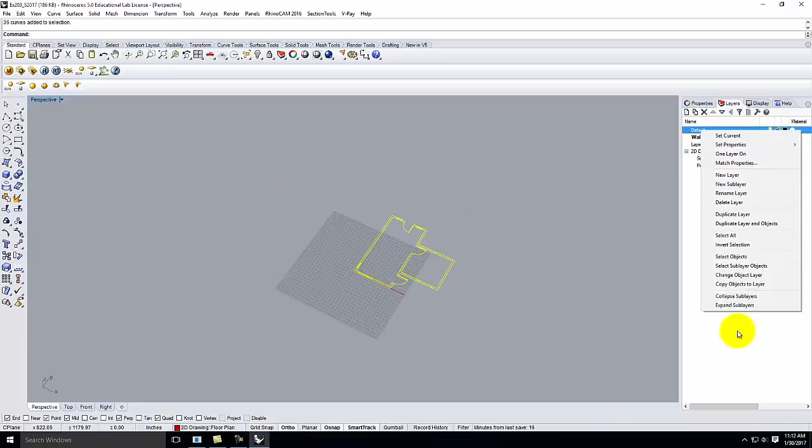So anyway, right now we're going to continue in our basic drawing in Rhino. And I was one step ahead of myself here. Okay, so I'm going to go back, and I was showing this in perspective as we got started, but I'm going to go ahead and get myself back into the basic top view. And this is a little bit further along than I got when I was demonstrating it live last class, but this is approximately where I hope you got as part of your last exercise.

So for today, for exercise 203, I want you to go ahead and start working with your exercise 202 file that you did last time. The door swings and the doors themselves are not really critical at this point, nor are really the windows. We're going to use them as cues as part of this drawing that we're doing today, but you can make some modifications as we go along.

So before we get too in-depth in today's drawing, I want to take a little bit of time and sort out our basic layer structure. And I haven't talked about layers just yet in Rhino, but as you start to move forward and create more and more complicated drawings, layers become really critical in Rhino. And I would argue that layers are even more critical in Rhino than they are in AutoCAD or in Illustrator or in anything else that you're doing.

Because as we get more and more complicated 3D models, we can have hundreds or thousands of layers. Let's say I'm doing a house, and I may have layers for a bunch of the house geometry itself, but then I may bring in an object, a furniture, a couch, a table, a chair, and that object might have 10 different layers associated with just that object. And then I bring in 6 different couches, and suddenly you can see how this multiplies out in a hurry, and I start to have lots and lots of layers.

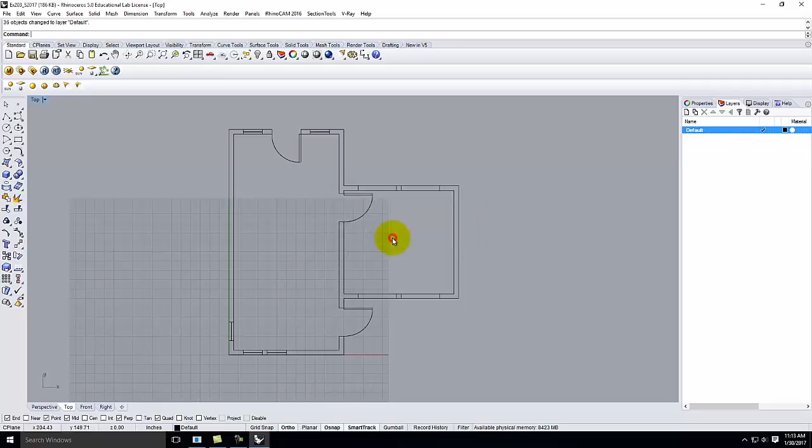So let me go ahead and delete these layers. We don't need them for right now. Yes to all. So chances are in your drawings thus far, you've worked in your default layer. If you're not seeing your layers over on the right side here, across the top in the standard ribbon, there's a little pie-shaped piece. It's a red, white, and blue pie. If you click on that, it will bring up the layers palette on the right side of your screen.

And chances are you did your drawing on the default layer. That would be my guess. Usually that's the default. It's the equivalent of layer 0 in AutoCAD. So it's your base layer. Now, as we move forward, we're going to want to create layers. And if we look at this layers palette at the top, the first button here is New Layer.

And so if I click on that, it will create a new layer. By default, the new layer is just numbered, layer 01. If I were to create another one, it would be layer 02.

Naming your layers really helps, because if you leave them as layer 1, layer 2, layer 3, and you had 50 layers, you wouldn't remember what was on what layer. So you really want to start thinking about how you organize your layers very early in the process.

So I'm going to go ahead and call this layer 2D drawing. I'll type out 2D drawing, and I will click off, and it will stay as 2D drawing. Okay? Now, one of the best things about Rhino and its layer structure is Rhino allows for you to nest layers. So one layer can be a sublayer of another layer.

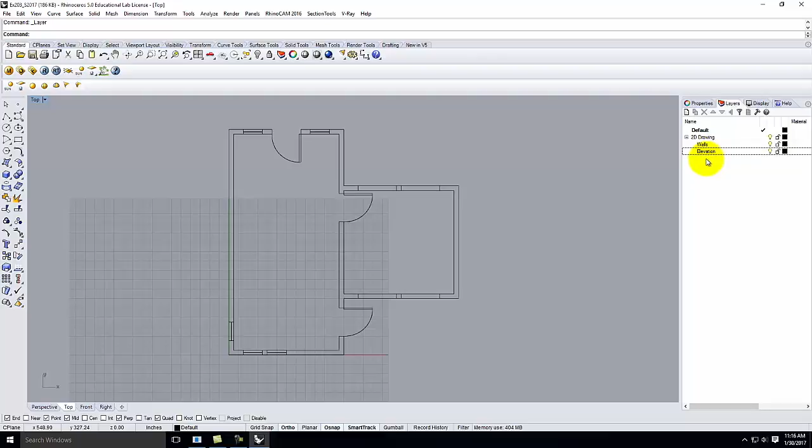Okay? So now I have a 2D drawing layer, I have a walls layer. And while we're here, let me create another new sublayer, and we'll call this elevation. Okay, so I have a 2D drawing layer, a walls layer, and an elevation layer. That's starting to work out rather nicely.

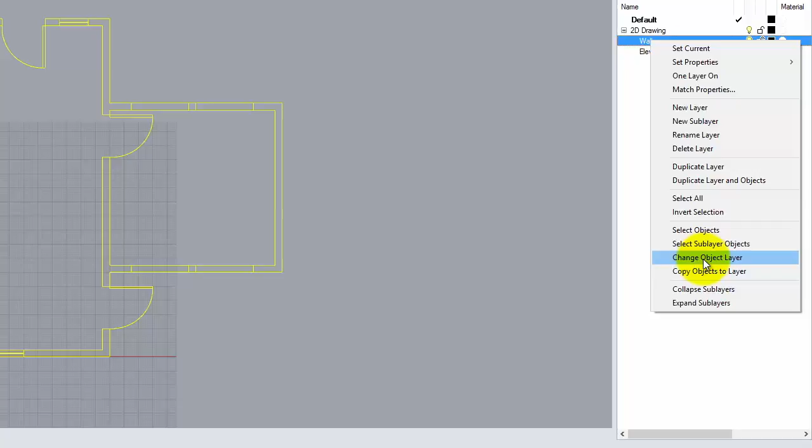If I want to change my objects to a specific layer, I can select my objects and then come over to the layer menu. I want these to go on the walls layer, so I can right-click on walls, and I can come down here to change object layer. And now those objects are part of the walls layer.

The current layer that you're drawing on contains a check mark next to it. So my default layer was my current layer. That was what I was drawing on. My walls layer here is not my current layer, but it is on. So there's a light bulb that represents on. There's a little padlock that represents locking or unlocking the layer. For right now, we're going to leave it unlocked.

And there is a color for the layer. The color has nothing to do with rendering. It just has to do with how you view the layer itself. So for example, I could turn it red, and objects that are on the walls layer would turn red. So all my objects are currently red.

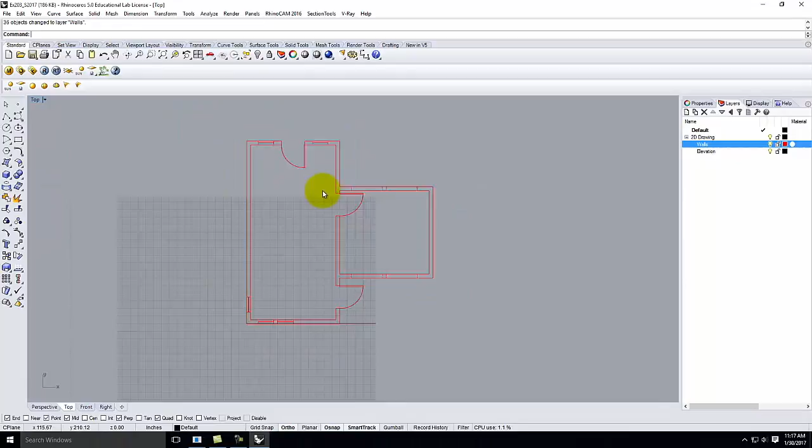So I want to take a little bit of time to draw out an elevation, or at least the start of an elevation for this particular building. I'll draw the south elevation down here for ease. Because I want it to be on the elevation layer, I'll double click on elevation, and you see that the check mark moves to the elevation layer. Okay? I can also change the color so that I can see it.

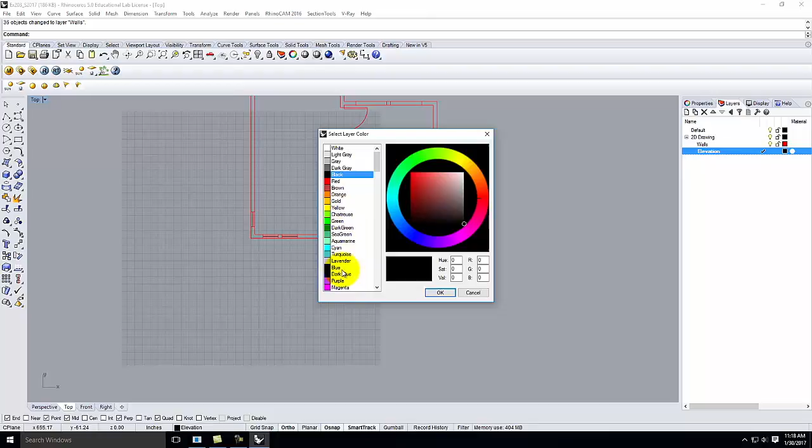One side note, when you're picking colors for layers, don't ever pick yellow. It actually shouldn't be an option, because if you were to pick yellow, it's exactly the same as if the object is selected and you can't tell the difference, and it will drive you nuts. So don't ever pick yellow. Any other color is fine. I'm going to pick blue just so you can see it for right now. The truth is, when I'm modeling, I almost always just model in black. It really doesn't make much of a difference.

So with the elevation layer as the current layer, it has the check mark, I'm going to draw out the beginnings of an elevation. We'll start with just the Polyline tool, and I'll pull a few lines down as guides. So we'll pull a line down there. I'll right-click to repeat the command. I'll pull a line down here. I'll right-click to repeat the command, and I'll pull a line down here.

So it's kind of like in AutoCAD, if you were in my 135, we did those rays and pulled them down in AutoCAD. We're essentially doing the same thing. I'll give myself a ground line. So once again, I'll pick the polyline here. I'll draw across the bottom there. I'll hit it. Oops.

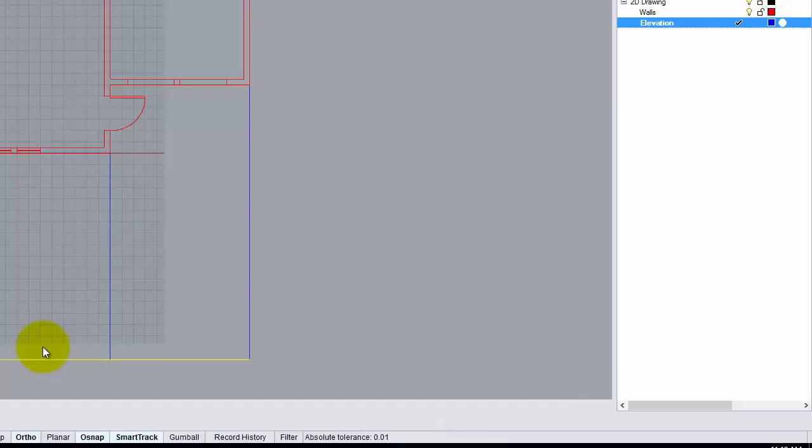Let's try that one more time. There we go. Enter. It doesn't matter. If it's not even, you can trim the ends. It's no big deal. And so in this context, there's probably a little bit of space below my building before the floor. So maybe let's go up by a foot. That would be theoretically my floor level.

And then let's go up from here. We'll go 8 feet. And that would represent the top or the ceiling level. And we'll go up one more time, and at least another foot for the ceiling itself, the roof, whatever. And we'll draw that one across. And so I have these lines going across there like that.

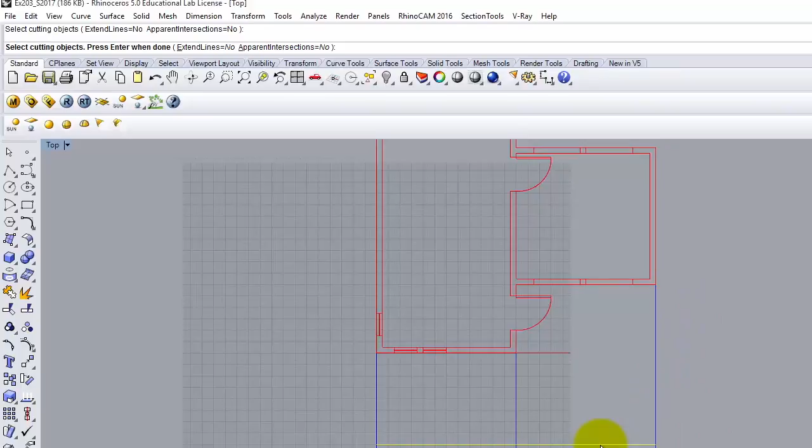Take a little bit of time, and I'll do a trim to get rid of these lines that don't really matter. So I'll go ahead and type trim. My cutting object would be this object that runs across the top. And I can then get rid of these pieces there, and there. Okay? In reality, if we were looking at this as a true elevation, we wouldn't see this line or see this line because those are just hidden lines. But for my purposes here, I'm going to keep them.

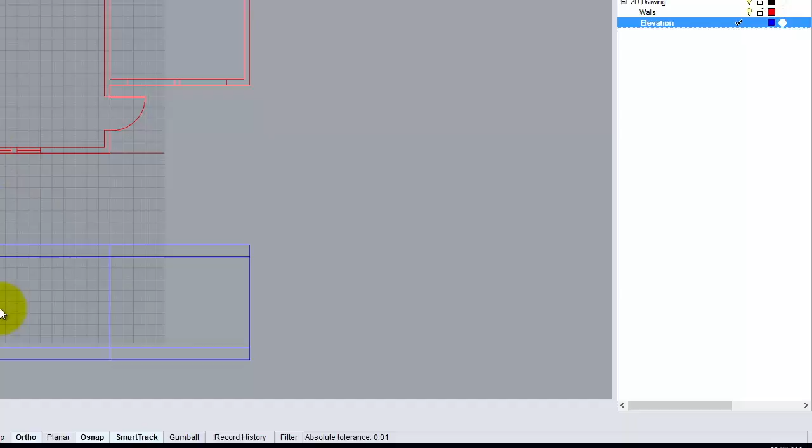Okay? So now I need to draw my little windows. So I'll do the same strategy here. And I'll draw and pull down a few lines. So there. And there. And again, those are just polylines that I've pulled down. And I need to specify a line off the floor for the height of the sill of the window and a line for the head of the window.

Okay, so let's say, and again, this is completely arbitrary. You can make it up. I don't really care. Let's go up here. I don't know. Let's go 3'6". And I'll draw across. And let's go up from here 6'8". And we'll draw across. And that gives us our nice little window opening.

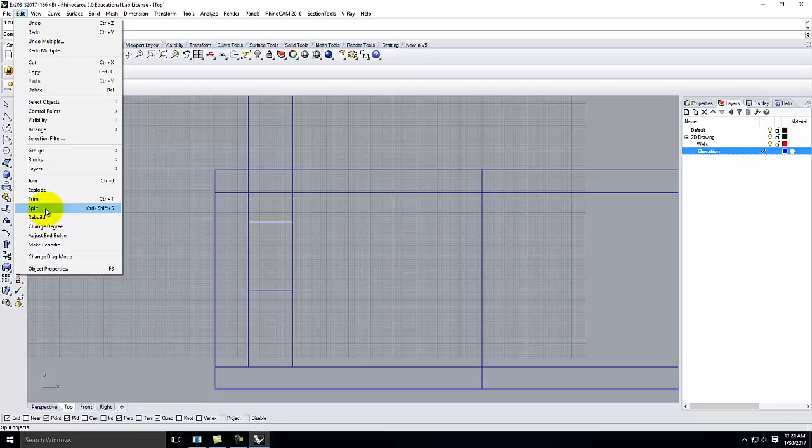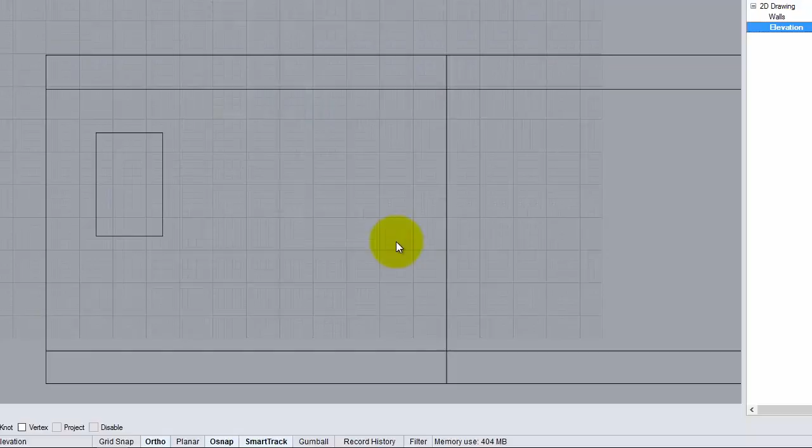Okay, so I'm going to go ahead and trim off, again, using those two as my cutting lines. So we'll go to Edit, Trim, and we'll pick this and this as my cutting object. I'll go ahead and hit Enter, and I'll get rid of the lines at the bottom and the lines at the top. You know, the blue's a little hard for you to see. Let me change that color. I'm going to change it back to black in the hope that that's a little easier to see. Is that a little easier? I think so. Okay, so let's continue on.

I want to draw this window again, and I'll do this as practice. I'll repeat all the same things. Obviously, I could copy this window over, which would save myself a little time, but I'll go ahead and practice again. So I'll draw a line, polyline, straight down. I have snap to perpendicular turned on to make sure that it snaps perpendicular. I'll hit Enter to finish. I'll repeat polyline. I'll draw this down to where it snaps to perpendicular again. And then once again, I'm going to draw with the polyline. Everything's been polyline so far.

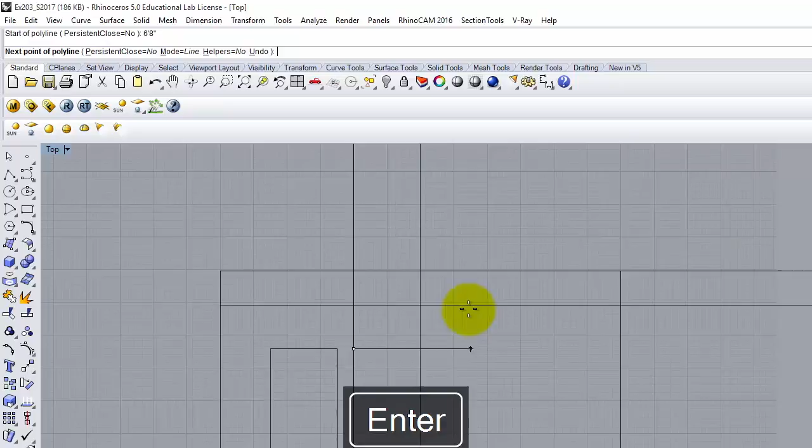And we'll go, using smart tracking, I'll go up 3'6". And I'll draw across, Enter. And I'll go, again, smart tracking, 6'8". And I'll draw that line there as well. I hit Enter to finish. And now I have these two horizontals, and we need to trim off the excess. So we'll once again go to Edit, Trim. Oops, sorry. Let me do Edit, Trim. And I'll select this and this as my cutting object. I'll hit Enter. And we'll get rid of those pieces there, there, and there.

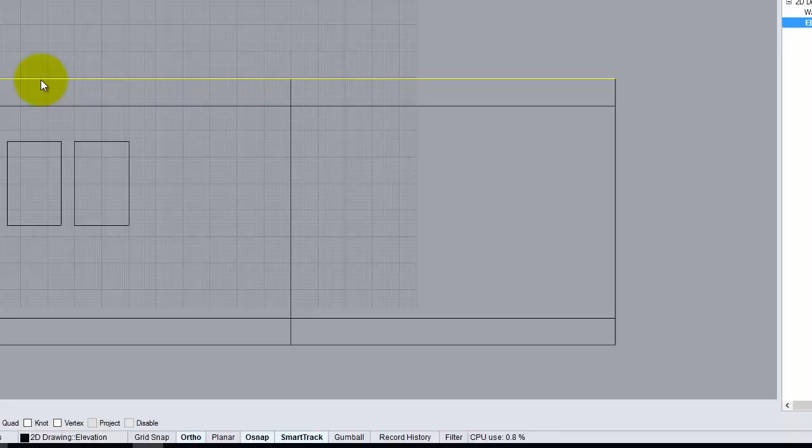Okay? So all I've done, essentially, is I've established where the ground is, where my interior floor is, where each of these windows are, where my ceiling is, and where the top of my roof is. Now, if I had a sloped roof, obviously the elevation would look different. But for right now, we're not even really worried about the roof. We're just going to do walls today. So I have those two.

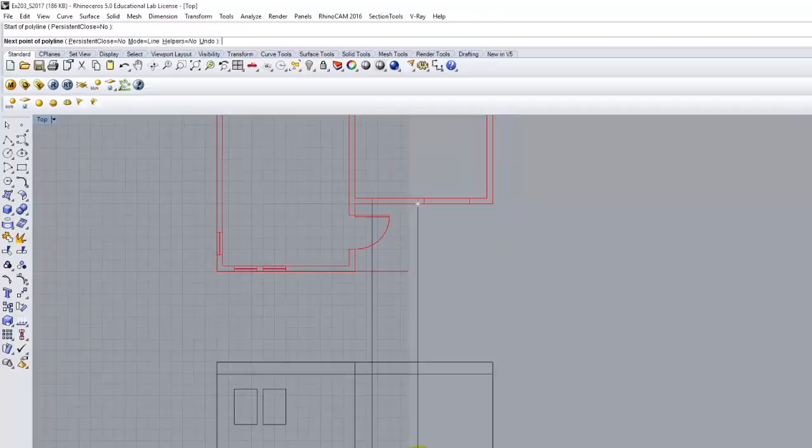I should probably draw the two windows that go over here as well. So for practice, we'll do it again. I'll go to Polyline. And I'm going to draw straight down to there. Polyline, I'll draw straight down to there. Enter. This time I'm going to use the head height the same, so we'll just go across. Now, we'll let it cross like that. And let's make the sill height a little bit lower since this is a bedroom window. Let's go 2 feet.

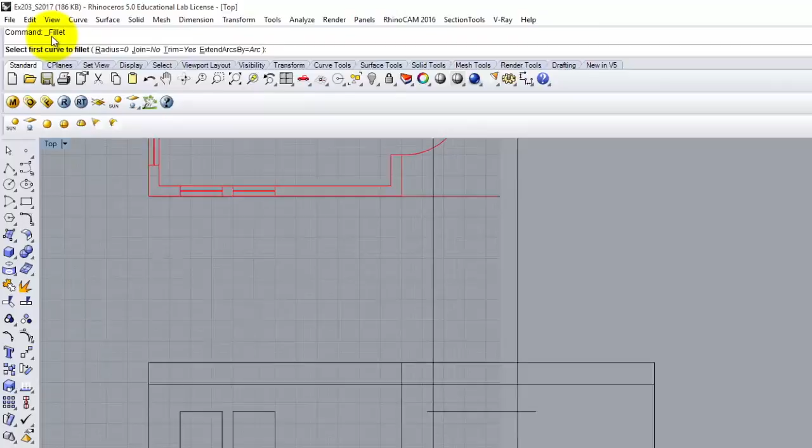Like that. We'll make it a bigger window. Okay? So previously I've been doing trims to get rid of these extra pieces. I could do trim as well, but if you remember from last class, there was a little cheater way of doing it, and it's to use a fillet instead. If I go to Curve and then Fillet Curves or type fillet, as long as my radius is set as 0, I can actually just connect those two ends.

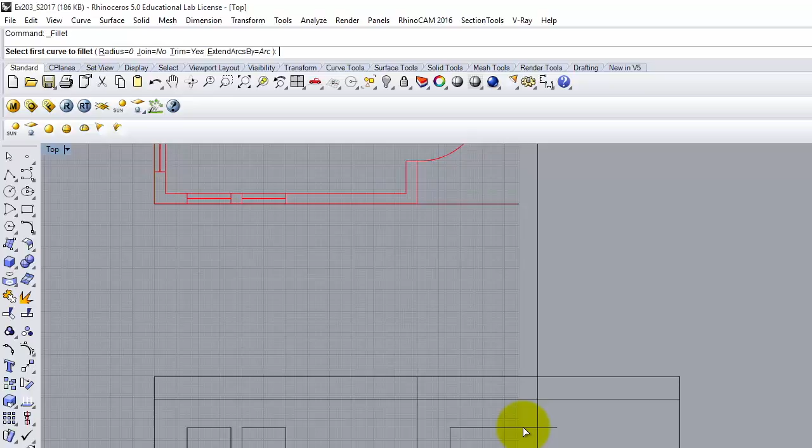I'm showing you this because it's a way of speeding up your process. For some people, this will start to make sense. For other people, you'll just trim it off and it'll be fine. The more you work in Rhino, the faster you start to learn these little tricks that can help. So I have a fillet. I've set my radius to 0. On my own computer, generally my fillet is always set to 0 by default because I always leave it at 0. I rarely use an actual fillet, so it stays at 0.

And it will let me go through and really quickly connect those corners together. Like that. So I'm right-clicking to repeat the last command. I click both sides of the corners and continue. So now I'm going to select this curve here, or this window. And since I've already drawn it, I'll just copy it. I'll use this floor plan to copy from there to over to there to create a second copy of the window. In reality, I probably would have done that all the way along and just made my copies because it makes life a little bit simpler. But it's good practice for you.

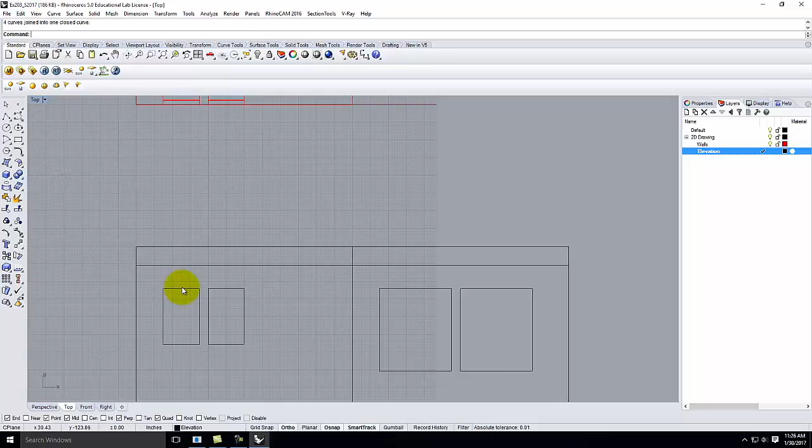So now that I have this set up here, I'm going to select the first window and go to Edit and then Join, because I want this to be one joined continuous polyline. You should notice when I do join, if I read the command line up here, it will say 4 curves joined into one closed curve. That's what we're after, the one closed curve. If we don't get one closed curve, maybe it joins into 2 open curves, it can be a sign that something's wrong. So let's do an example there.

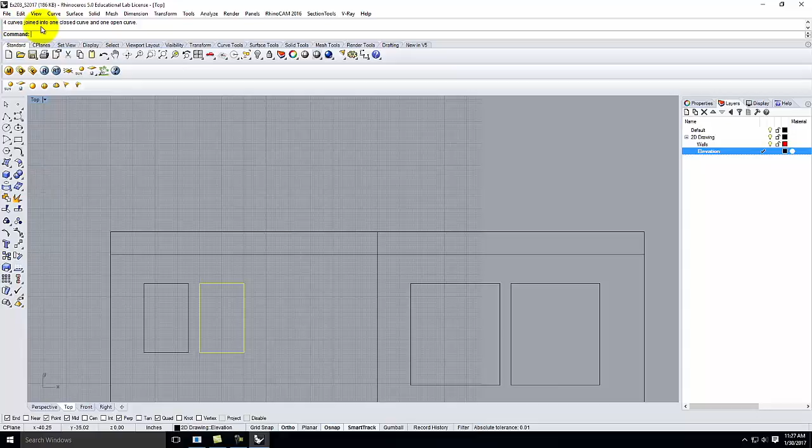OK, so now I messed this up on purpose. In this case, I have a curve that overlaps. I have a curve underneath here, and then I have these individual curves there and there. So if I were to select all of these and go to Edit and then Join, and I look here, 4 curves joined into one closed curve and one open curve. Right? So something's wrong here. It probably means that I have one closed curve and an extra piece right there at the top. That's a problem.

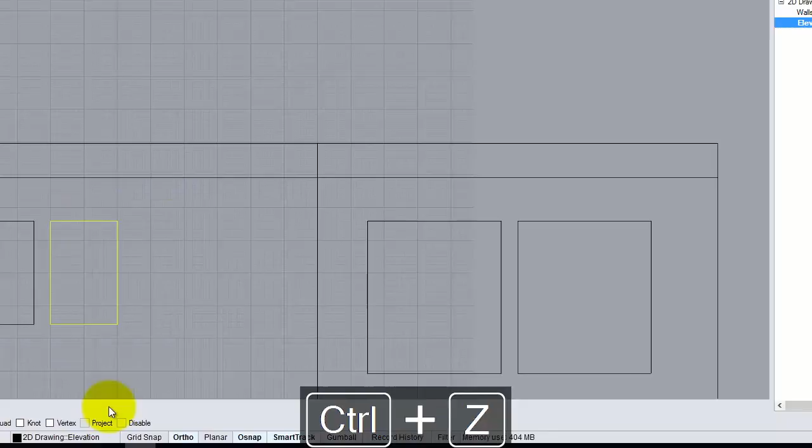The other thing that could happen is, let me go back a second. Let me get rid of this, and let me draw a curve like that. Now if I were to join this, 4 curves joined into one open curve. Well, this one's kind of tricky, because if I click on it, it looks like a closed curve. But the truth is that there's a segment that goes over here, and then this segment goes underneath that. So there's an overlap happening right here. And that overlap will cause problems when you try to do an extrusion down the road. So we don't want that.

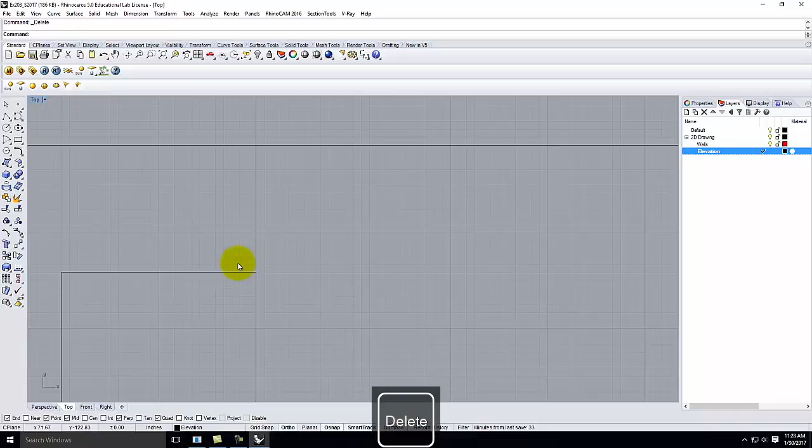So I'll type explode. There's my overlap piece. Let's get rid of that. And let's take this overall piece, join, 4 curves joined into one closed curve. That's exactly what we're after. So I'm going to do the same thing with this window. Edit, Join, 4 curves joined into one closed curve. Happy. Take these, Edit, Join. Obviously, I could type Join as well. And now those are joined.

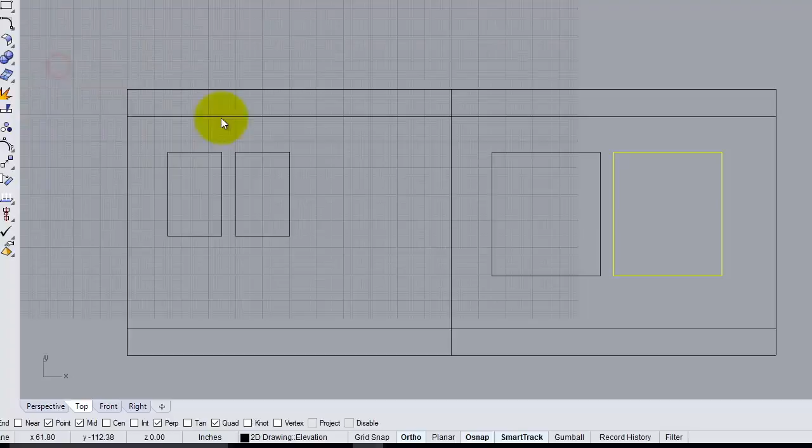Okay, so let's say that I want to offset this to create a little bit of depth in this particular window. So let me go ahead and offset. My distance is not 1,200 inches. How about a distance of 1.5 inches? And I want it to go to the inside, and now I get a little offset there. Starting to look a little more like a window.

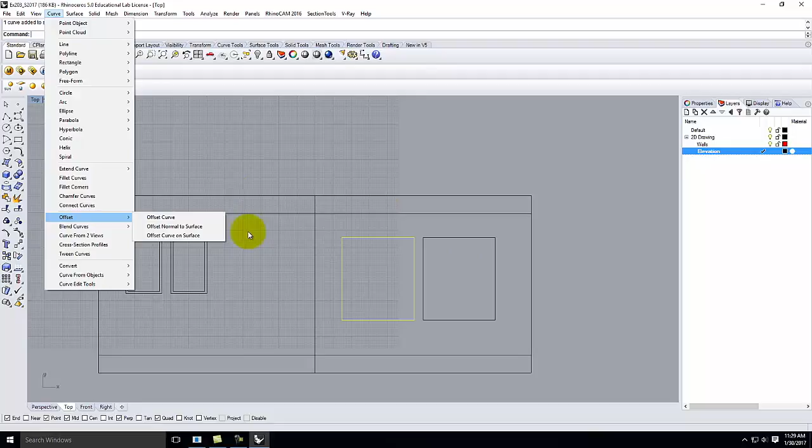I'm going to repeat. Same thing. Curve, Offset Curve. There you go. Obviously, I type in offset more often than not, but that's where it is. It's set, again, distance 1.5. We'll go to the inside there. I can right-click to repeat the last command, and we'll put it inside there as well. So now I have little borders around each of my windows, right?

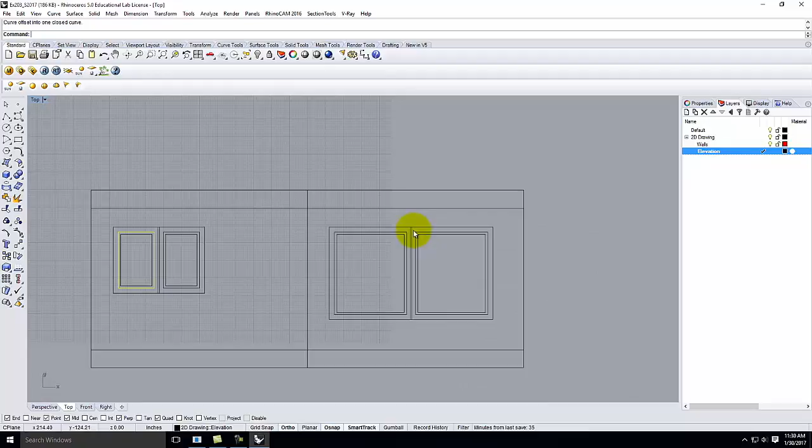Let's say that I wanted some window trim to go around the windows. I could repeat the offset again, and I could say that I want my distance to be 3.5. And we'll go from there, and that creates a little bit of trim outside the window. We'll do that as well. There. And there. So obviously I have a little bit of a problem because these are overlapping, and that can be problematic. In reality, I should probably take these and explode them.

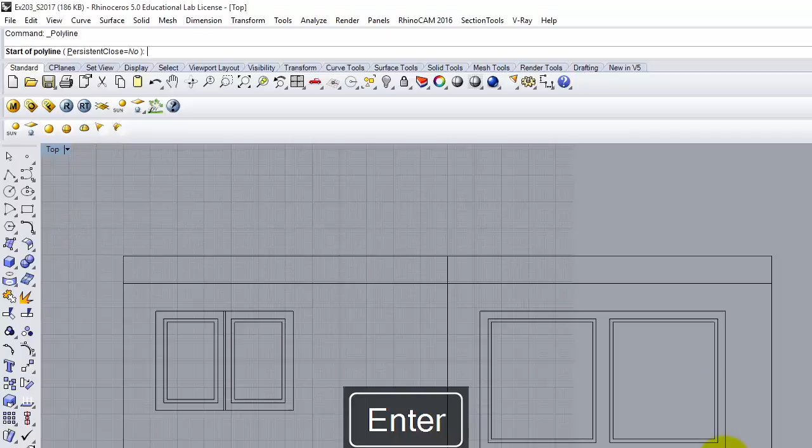Explode. Let's get rid of those lines. Let's get rid of these lines and that line. And then I'd redraw the trim that went around the window to include both pieces. Okay? That would allow me then to take these 4 segments and to go to Edit, Join, and join those together. Okay, again, you see that there's kind of a theme of I'm trying to join these together. You'll see in a little bit why the joining is important. Okay?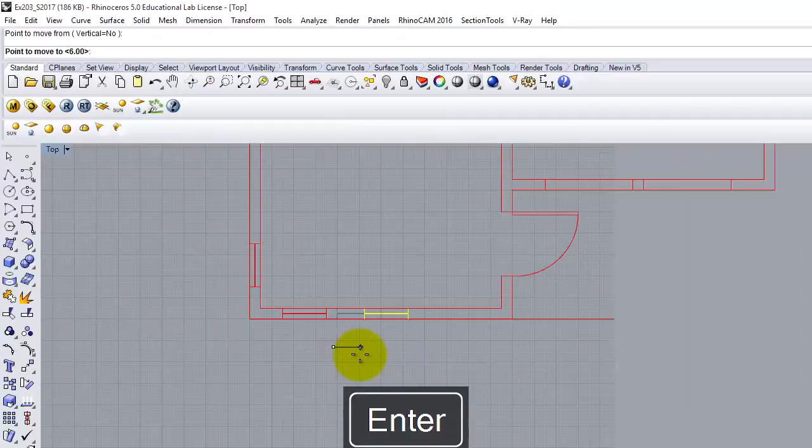Alternatively, we could change the windows. We could also just say, you know what, I really didn't want my windows to be that close together. Let's move that over by 6 inches. Oh, that's so much better, right? And then let's take this window here and let's make it match. Move 6 inches there, right? So I could do that too. Again, there's no science to this. It depends on what you design-wise would want to have.

Okay, so now I have a loose elevation of what I was after. And I haven't gone too in-depth with what the windows look like. I don't have mullions in the windows or any of that. We'll get to that. We'll build windows. We'll make mullions. We'll do chamfered edges. We'll get to all that. But we're just going simple for right now. Okay? So I have this elevation.

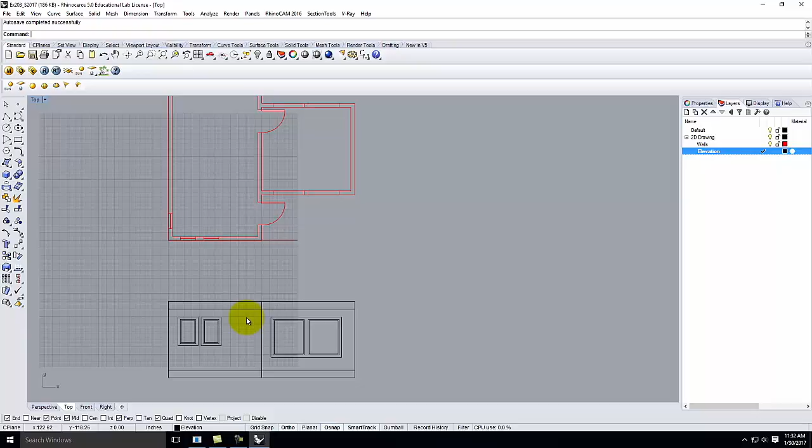And thus far, everything that we've done in this class has been 2-dimensional, except for the first day, but that doesn't really count. So last class, we did everything 2-dimensional. Now comes the moment where we start to make this stuff 3-dimensional. So I'm going to go from the top view. I'm going to double-click, and I'm going to go into the perspective view and make that big. So we can see as I right-click to orbit around that I have my floor plan and I have my elevation, but they're flat on the ground.

And so the first thing that I need to do is I need to start to see this, instead of flat in the ground, in 3 dimensions. And this elevation, obviously, shouldn't be flat. It needs to be standing up vertically. So we're going to make that happen. And we're going to use a command called rotate 3D. And I think rotate 3D is awkward the first time you use it, and then it starts to make more sense. And that's because it's asking for more information than you're used to rotations asking.

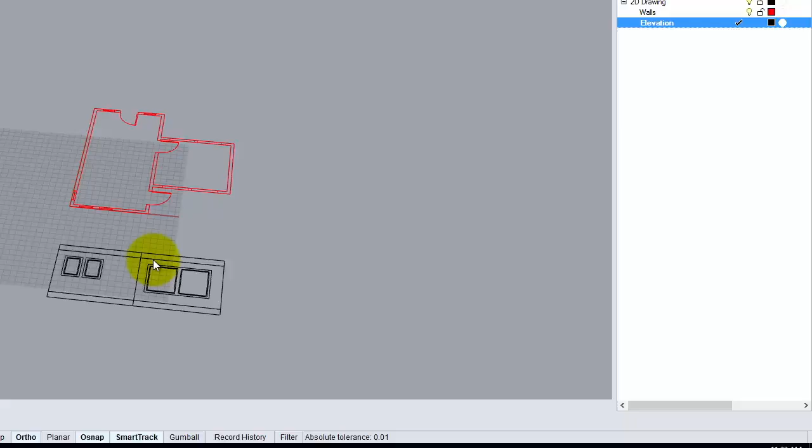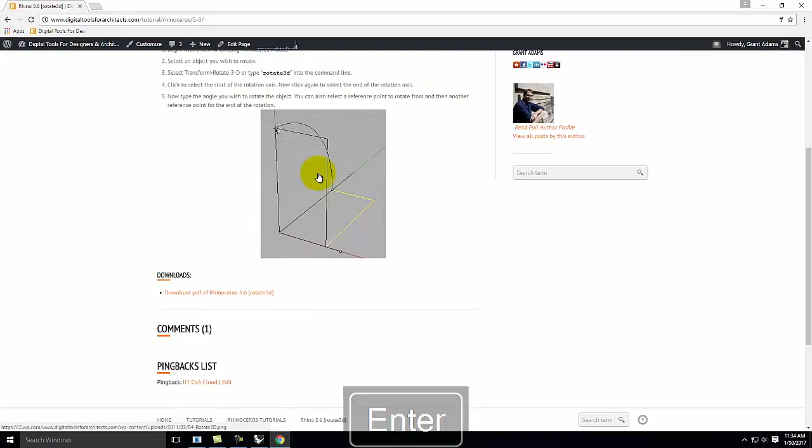Okay? So we'll go up to Transform, and you'll notice that there's 2 different rotates. There's regular rotate and there's rotate 3D. Because we're working in 3D, we're going to work with rotate 3D as the command. This, by the way, is written out under Rhino 5.6 if you want to look at the step-by-step of it. Let me pull it up just so you can see. Let me log in real quick. All right. So this can help because you have the extra little image that kind of talks through what's happening. So if you want to look at that, you can of course look at that, but I'm going to go through it live.

So when I go to Transform and then Rotate 3D, it's going to ask me first to select the objects to rotate. No surprise. What do you want to rotate? So I'll select all of my elevation, and I'll hit enter. Then it asks for the start of the rotation axis. So if we rotate in the traditional sense, we have a point that we want to rotate around. The difference here is that instead of a point that we're rotating around, it's a line.

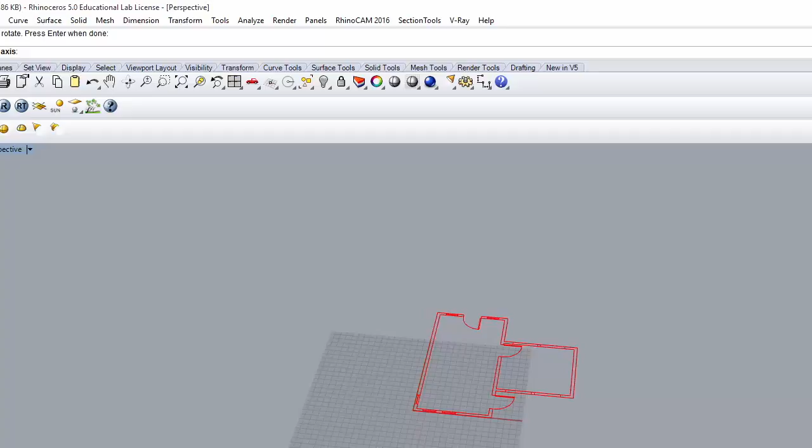And so we have to envision if I have something that's flat on the ground here, and I want to rotate this up so that it's standing up like that. The axis of rotation, or the line that I want to rotate around, is this line right here, right? And I want to rotate around that line. Does that make sense? So the axis of rotation in this sense is going to be right here, starting right there, going over to right there.

And the reason that I picked this is because this is floor level, and my floor plan would be at floor level. So I go from right there to right there. That was my axis of rotation, so start and end. Then it says angle or first reference point. So I want to establish a reference point, and that would be going along the side here as my reference point.

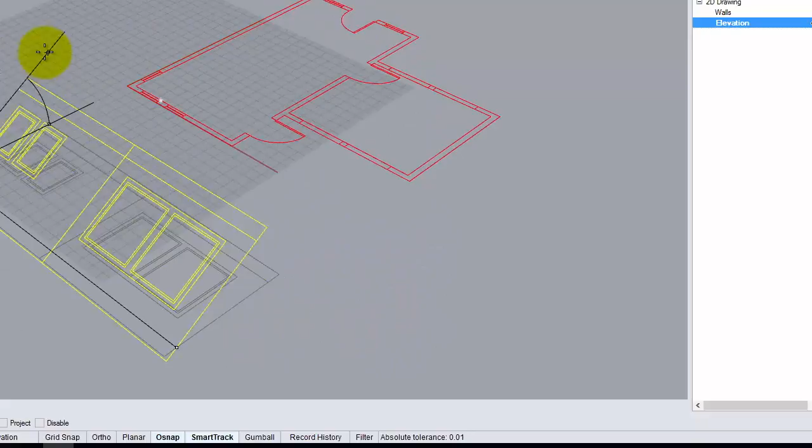And assuming that I have, oops, there we go. Oh, come on. My mouse is not clicking. There. Assuming that I have ortho turned on, which it is, I can control what this rotation is. If ortho's on, it will jump 90 degrees. So it's up in the vertical plane. So now, as we orbit around, you see that that is in the third dimension.

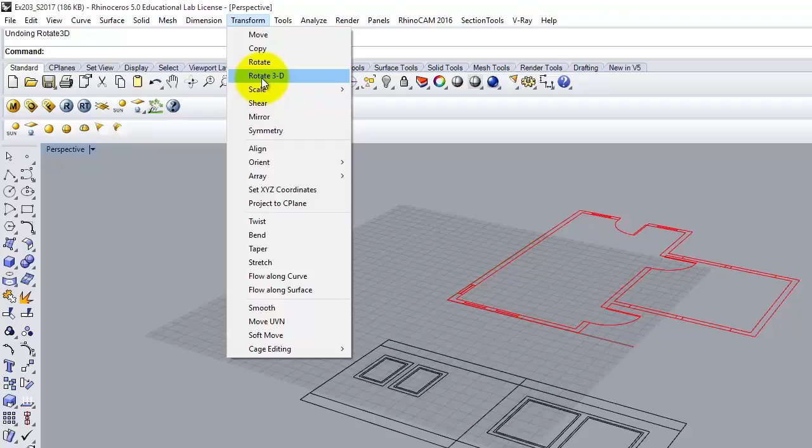Okay, so let's do that whole thing again. So I have it flat, and the first thing that I'm going to do is go to Transform, Rotate 3D. Select objects to rotate. Go ahead and select those. Remember, I'm right-clicking to orbit. And you notice that when I right-click to orbit, it can be in the middle of another command. So I can always orbit as I'm working in Rhino.

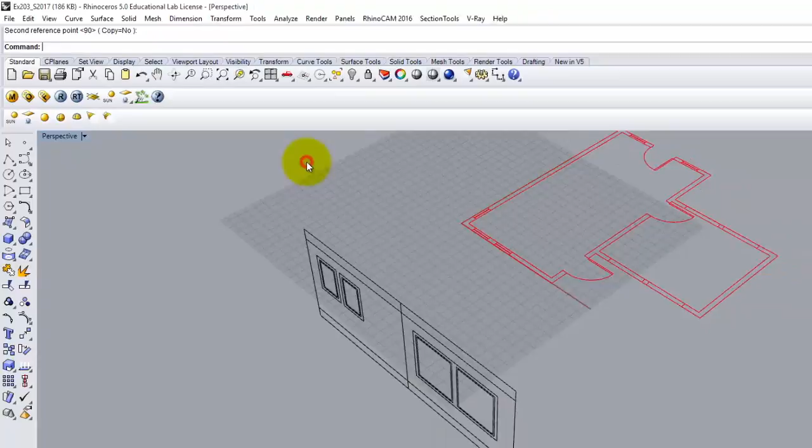So I've selected the objects. Press Enter when done. Start of rotation axis will be right there. End of rotation axis will be right there. My angle or first reference point would be right there. And I want it to fold up to be 90 degrees. Obviously, I could have it go in one of the other directions if I wanted as well. So there it is, going up 90 degrees. And I'll go ahead and click. And so that gives me that first elevation. Make sense so far?

OK. So at this point, I need to actually start making some real 3D surfaces. So I have this established. But I'd like to go back to my layers and create a new layer for 3D model. Okay? Now I had a problem. I accidentally created the 3D model layer, and it showed up on the 2D drawing layer as a sublayer. Obviously, 3D model shouldn't be a sublayer of 2D drawing. So let's move that out. And there's actually an arrow facing left that says move up one parent. And if we click on that, it will move it outside of this 2D drawing layer.

So now I have 3D model. I can create a sublayer for 3D model called walls. Notice that I have a walls layer here and a walls layer here. They're named the same thing, but they're underneath the 2D drawing layer and the 3D model layer. Okay, so it allows duplicate names as long as they're sublayers. OK, so let's make the walls layer current. There it is with the little X.

And I should point out at this point that I can actually turn off all of the 2D drawings by turning off the 2D drawing layer. Or I can turn off individually just the walls or just the, why is my mouse so sticky? Sorry. Or just the elevation. There it is. So I have control. All the 2D drawings, just the walls, just the elevation. So with them still on, I'm going to go ahead and have walls as my active layer.

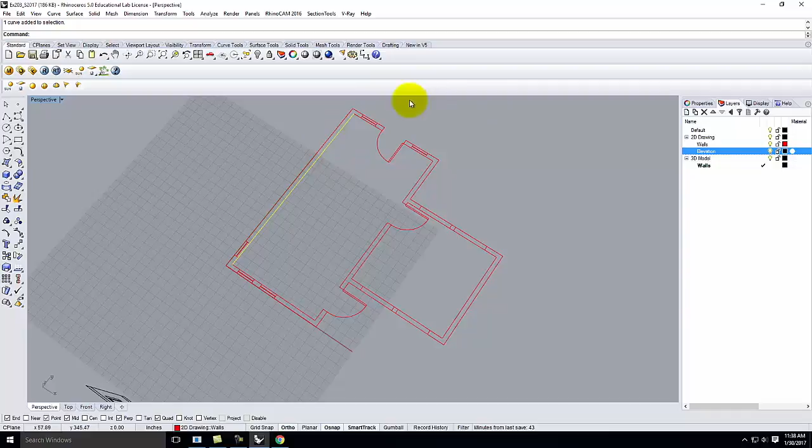And I'm going to take a look at the walls layer. And I want to make sure that these are closed polylines, okay, which they currently are. If they weren't, let me go ahead and explode it, and I had individual segments, I'd want to go through. I'm going to hold down Shift and select the lines that would make up a closed polyline. All right, so there I am. I'll type join or go to Edit and then Join. 10 curves joined into one closed curve. Perfect. That's what I want. Nice closed curve. Okay, this one happens to already be done as one closed curve. So I'm happy with those two pieces.

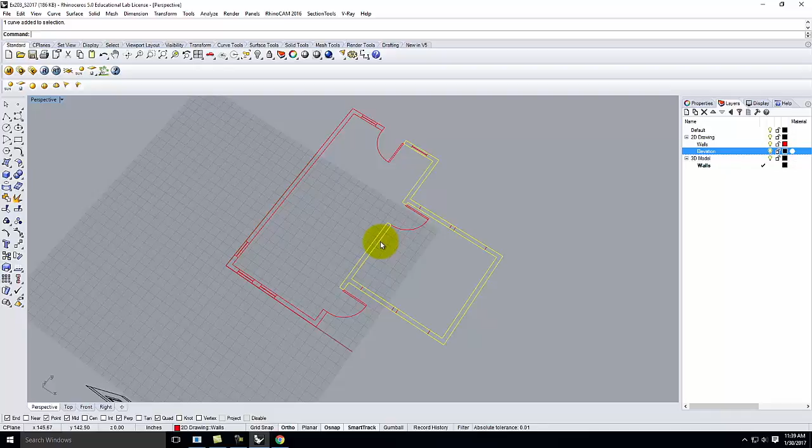So at this point, I'm actually going to make a 3D object for the first time. So we'll take the curve, and I'm going to extrude it. So we're going to go up to Surface, Extrude Curve, Straight. You could also just type extrude. All right, so there it is. Select curves to extrude. I'll pick the first curve there. I can select multiple curves, but I'm just going to do it once so that I repeat the process twice. So I'll press Enter when I'm done. And then it asks me for an extrusion distance, which is good. But before I do that, I want to look at the options.

Okay, so I have some options. First thing is I have a direction. I have both sides, yes or no. So just like an offset, I could have it going both directions at once. In this case, I don't want it to. Then I have something called solid. Do I want it to show up with a top and a bottom? Okay, in this case, I do want it to have a top and a bottom. So I'm going to say solid, yes. Then I have an option for delete input. Sometimes you draw a curve on the ground and you extrude it and you want that original curve to go away because all you really wanted was the extrusion, the surface.

You don't want the original curve. In this case, if you said delete input yes, it would get rid of the original curve. Since I have the 2D drawing on the walls layer, I can leave it there because I can turn the line off later on. I can turn the curve off later on. So we'll leave delete input as no.

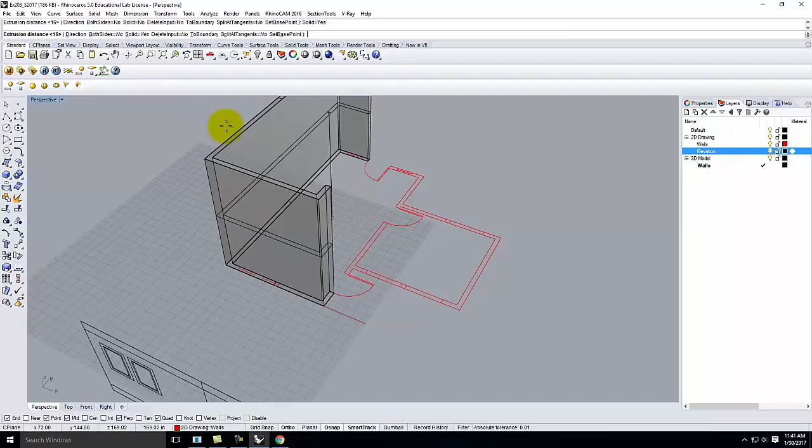So that extrusion distance, right, is to the top of that wall. Because I have the elevation drawn, it makes life really easy because I can just snap to the top of the wall. Otherwise, I'd have to know that it was 9 feet, for example. Right? But I already have it drawn, so we'll just snap it to 9 feet. And now I have a 3D object.

You may see this as a wireframe at first, which would look something like this, rather unimpressive. You will probably want to change it to be in shaded mode as your primary source. If you switch to rendered mode, which can be great for previewing V-Ray and whatever, you can end up losing objects like suns, lights, they don't appear. And that can be problematic down the road. So I suggest when you're doing modeling that you stick with shaded mode.

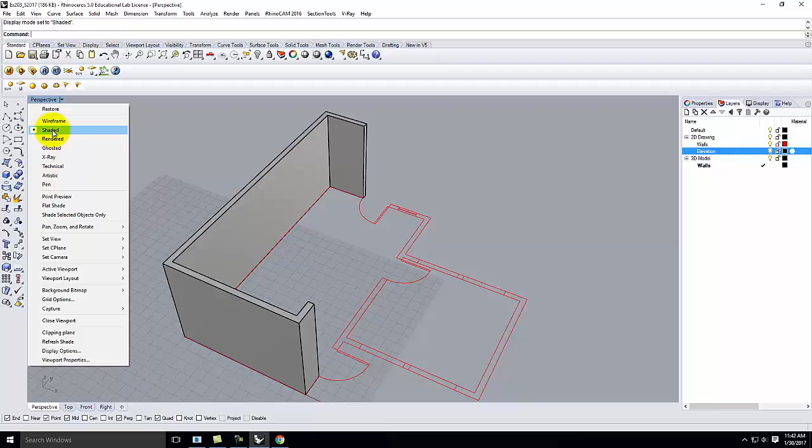And once again, to change modes, you go to the little triangle that's next to where it says perspective or whatever view you're currently in. And you click that triangle, and it's right here under wireframe, shaded, etc. Okay, so we're going to leave it as shaded mode for right now. And I have my first surface there.

If this was not solid, I'd be able to see through the walls. I'm going to do an extrusion where it's not solid so you can see that for just a second. So let me take this, and I'm going to go ahead and extrude curve. And this time I'm going to set solid to no. Okay, and I'll extrude it to the same height there. And so now as we look into it, see how we can see down inside my walls? Makes it less desirable, okay? Because I'd ultimately have to put a cap on it if I wanted to.

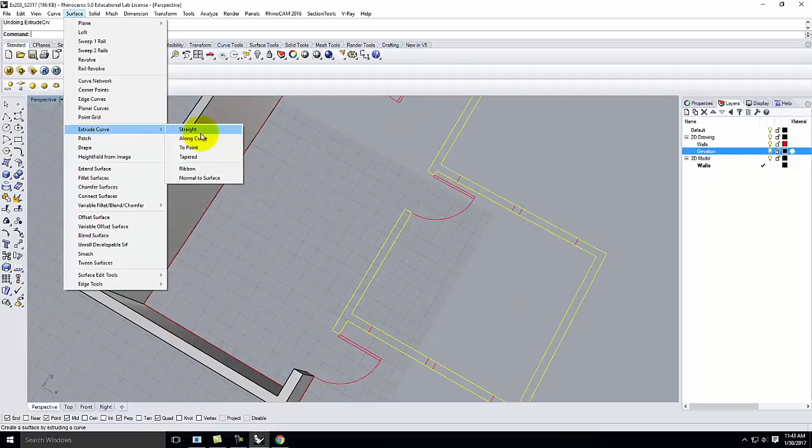So in this case, I'm going to go back. We're going to extrude curve again. So that's under surface, extrude curve straight, or just type extrude curve. And I'm going to set solid to yes. And I'm going to make sure that the height matches up with my drawing or my existing object. There it is. Okay? So we have now some walls that are existing in 3D. That's exciting. That's what we're after.

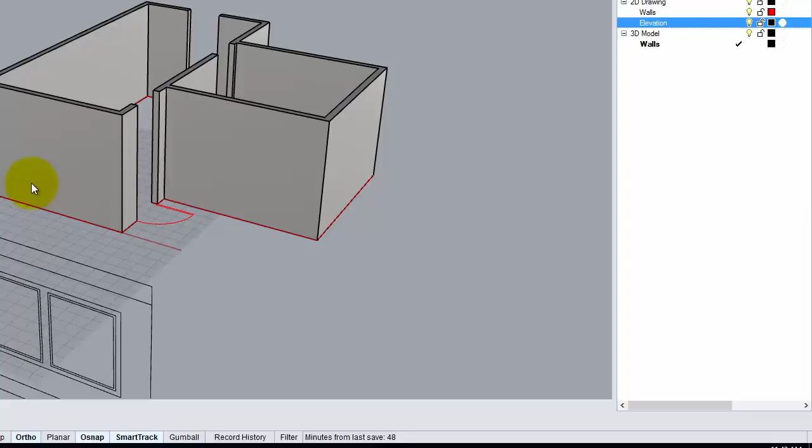Okay? So now that I have those walls existing, it would be nice to have these windows appear on these walls. Okay? And a lot of you have worked in SketchUp before, and you know that you can go get the component, you can try to stick it into the wall, and then you try to delete parts of the wall, and the wall disappears, and it's this giant hassle. Right? Okay? So welcome to the magic of Rhino. So we have this drawing that's here, and we have these nice curves that we've drawn. And we've lined everything up, so it looks pretty good.

The next piece of this puzzle, and this is part 5 in the exercise for today, is a command called project. And I would say this by itself is the best command in Rhino. Well, or make 2D. It's a tie between the two. Okay? We'll cover make 2D at the end of the semester. But for right now, this is the best command that you can possibly learn.

And what it does is it takes a curve and it essentially throws that curve in a straight line and creates new curves on any surface that it intersects as it does it. Okay? Unfortunately, you have to be very precise with how you execute the command.

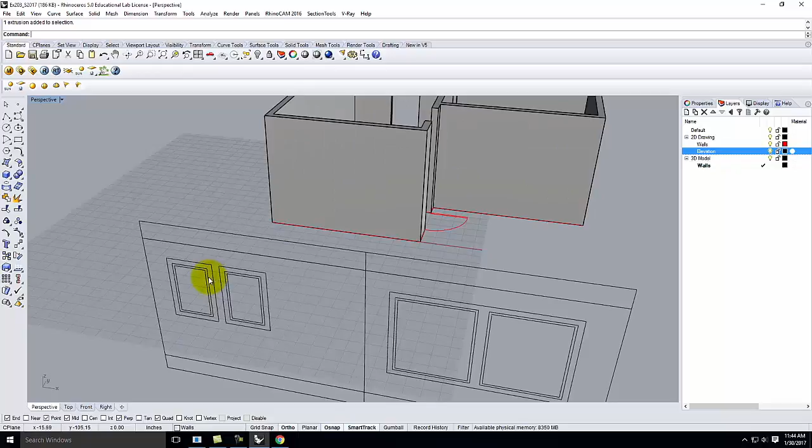So what we're going to do is we're going to take these windows right here and throw them off so that they end up on this surface. In order to do this, we're going to initiate the command in a view that is perpendicular to the direction that you want the projection to happen. So in this case, we're going to start the command in the front view.

Right? So I can see my curve right there. Notice that when I select it in this view, we can also see it in the perspective view. I'm leaving all 4 views up so you can see this happen. Okay? So we're going to go up to curve from objects, project, or you can type project. All right? And when we do that, it says select curves and points to project.

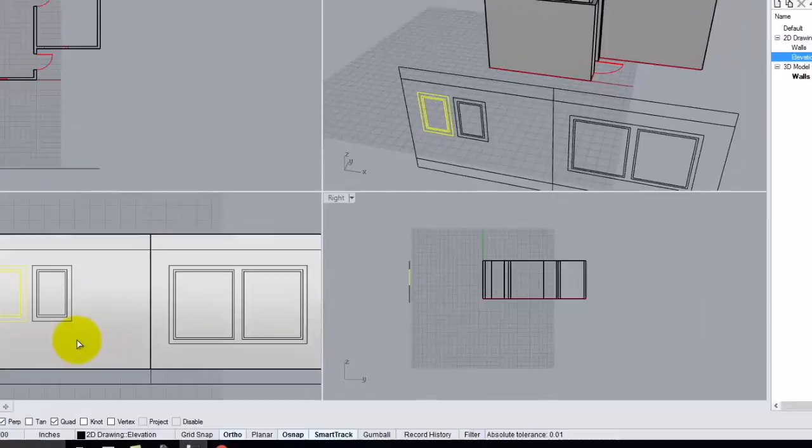So we'll start with the first window, which is right there. And I'm going to select the window, the inside frame, and the outside frame. Once I've done that, I'll go ahead and hit enter. And then it'll ask me to select surfaces, polysurfaces, and meshes to project onto. Okay? Well, I have a nice polysurface right here. I'm going to go ahead and click on that polysurface. And you can see in the perspective view that it selects it for me.

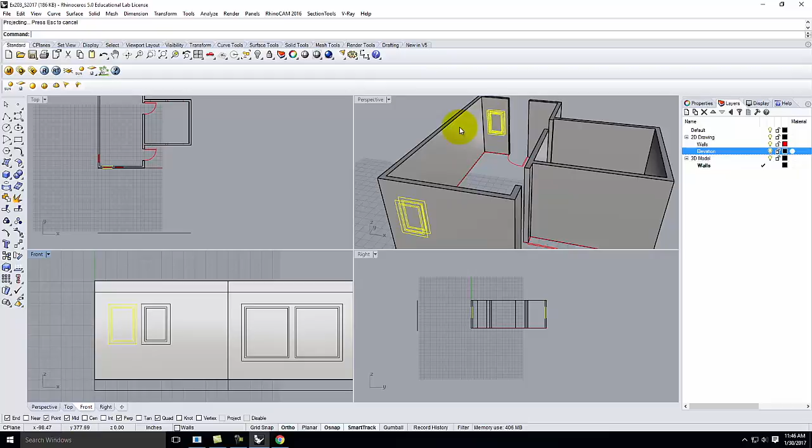Okay? Now that I have that selected, I'll go ahead and hit enter, and you'll see it happen. So there it is here. It took those curves and basically threw them out in a straight line, and anywhere it intersected a surface, it made new curves. Okay? So this is really cool in a straight sense. We have a flat surface. I could, of course, take this and I could copy it and I could move it to be over there on the surface. Okay? That's fine.

But imagine this was a curving wall, or it had a warp to it and it bulged out at us or something. I can still use project to throw the lines onto any surface that exists. So when we ultimately have a piece of topography, we have a floor plan, we could take that floor plan, we could project it down onto the topography. No matter what slope that is, we can get the footprint of our building to be able to cut it out. So it ends up being a very, very powerful command. That's why I teach it so early in class.

So let's practice that again. You will have bad results if you try to do a project in a perspective view. So if I went to curve from object, project, and it said select curves, and I selected my curves. We'll say it's that set right now. I hit enter. Yeah, okay, I want it to show up on this wall, and I hit enter.

Okay, I get this. The projection missed the selected objects. Okay, it's because it's not in line. The view that I'm looking in is not perpendicular to how I want it to project. So I have to be in the front view to do this projection. Okay, so let's do it again.

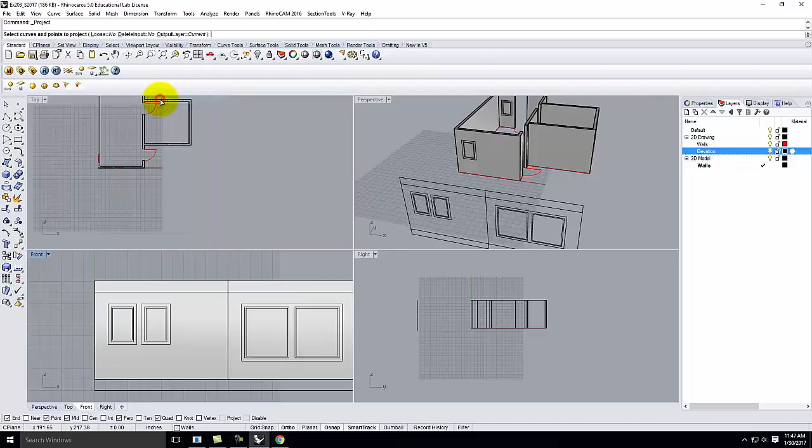Curve from objects, project. I'm going to pick this second window here. There it is. I'll hit enter. Select surfaces or polysurfaces to project onto. There's my surface. I'll hit enter, and I get my second window right there. Now in that case, I have some extra lines that show up back here because it intersected this doorway a little bit. So I don't want those lines, so let's go ahead and get rid of those lines. And we'll press delete, and those lines go away. So I have it just here. I'll continue and do these two.

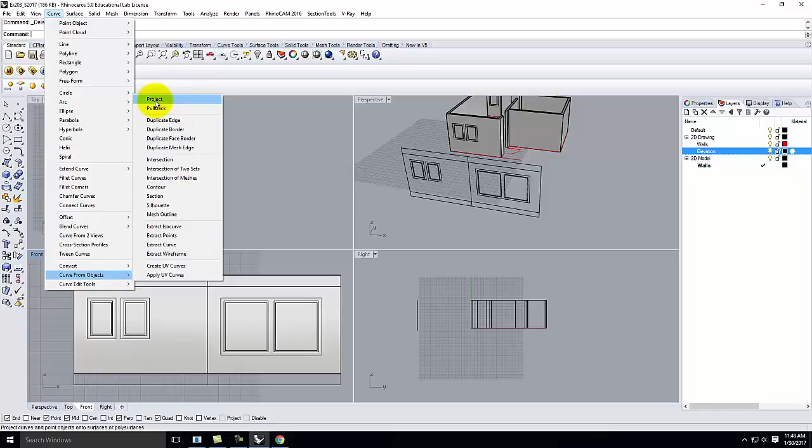I could also project all of these at once, so I don't have to do them as separate steps. I'm doing it as separate steps so that it's practice, right? And you're seeing it over and over again. So front view, curve from objects, project. My mouse is not clicking today. There we go. Select curves.

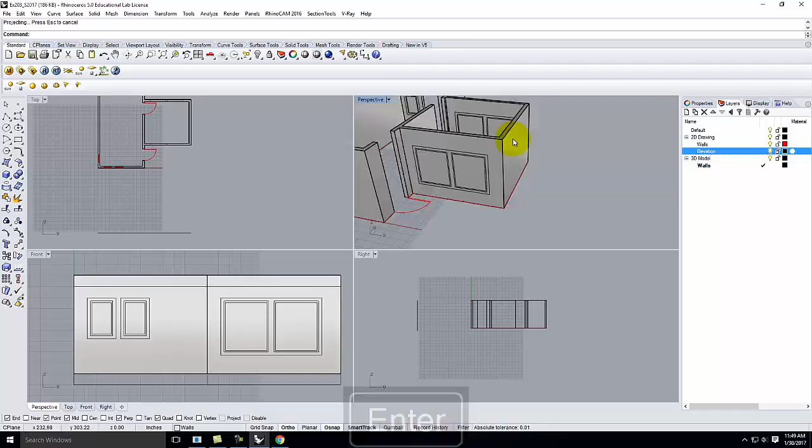There it is. I'll hit enter. Select surfaces. This time it is this half. And I'll go ahead, press enter. And now I get those windows on both pieces right there. Okay? So at this point, I've managed to get all of my windows onto my walls. I could very easily draw another elevation view for one of the other sides if I had windows in other places and do the same projection. Okay? For the most part, this has solved most of my windows.

Okay? So now I'm going to go ahead and turn off all the 2D drawings because I don't need them anymore. Right? And now I have just the walls here. I guess theoretically I could have left these curves on one of the 2D drawing layers. Kind of doesn't really matter. It's an organizational thing. To me, they're part of the walls, so I left them on the walls layer.

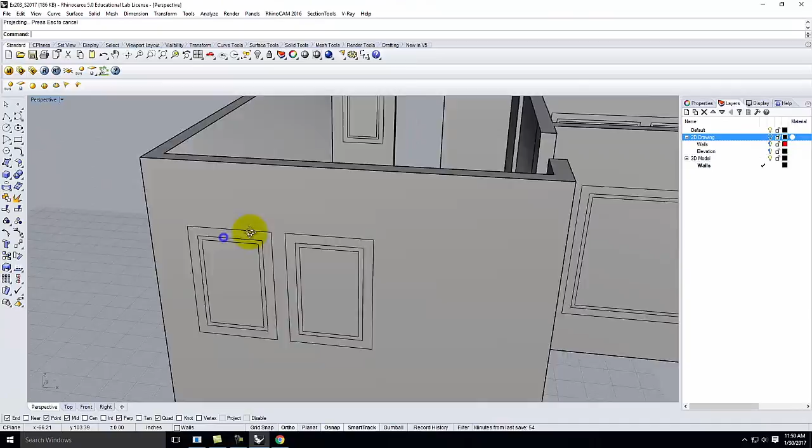Anyway, so at this point, I want to actually cut out what's happening here. So I want to be able to cut out the window that goes through. And there's two different ways to go about it. One is a little bit more complicated than the other, though the one that's easier may or may not work depending on how well you drew your windows.

Right? If you don't have a closed curve, the easier way will not work. Okay, so let me go ahead and show you. I'll show you the easy way first. So we're going to come down here, and there's an icon here that's called Boolean Union that has two spheres in it. We're going to click and look underneath that, and there'll be an object for make hole.

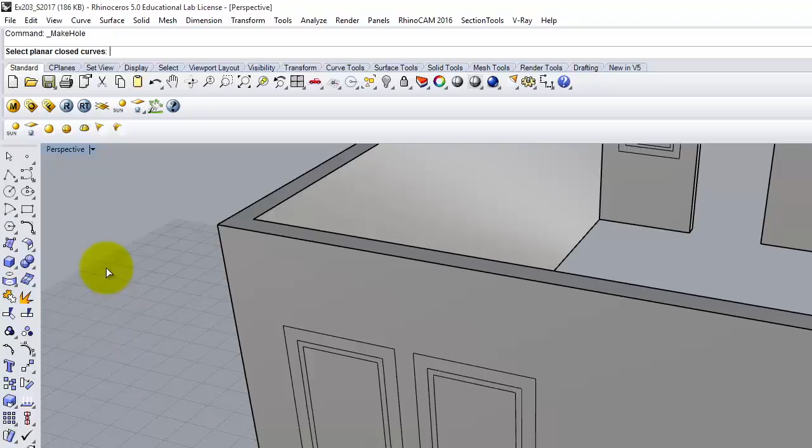Okay, it looks like kind of a little white line with kind of a window curve and a surface. That's what we're looking for. It's called make hole. You could also type make hole. It might be a little easier than finding the actual icon. Okay, and it says select planar closed curve. So we need to make sure that the curve is actually planar, which means it's all in one plane, which this curve, for example, is.

Okay, so there's my planar closed curve. I'll press enter when I'm done. There it is. Now it says select a surface or polysurface. So I'm going to select my polysurface, which is right there. Then it's going to say, what is the depth that you want? So I want to be able to snap to the other side of the wall. So we'll snap right there to the other side of the wall.

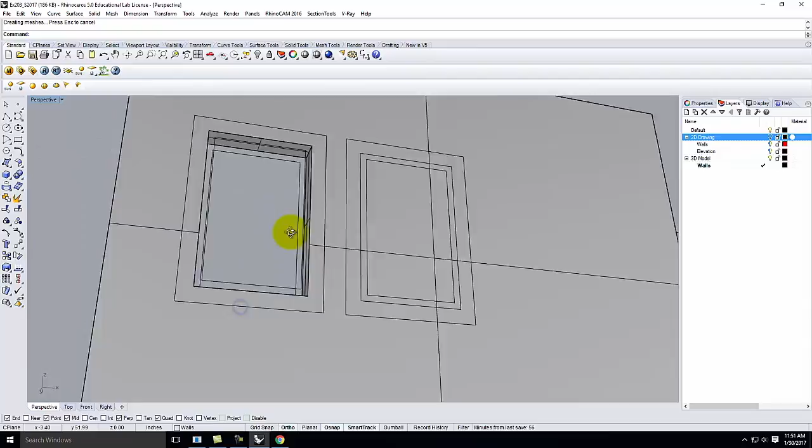And when I do that, it will actually cut a hole straight through my wall, and it will give me these little surfaces on the inside, making it solid. Make sense? Okay, really easy. The key is you have to have that planar closed curve that's coplanar with the surface that you're punching through. Right? So it's very specific in terms of its requirements.

So let's do that one more time with this window. So I'll go once again to make hole, which is underneath the double spheres right there. Select planar closed curve. There it is. I'll hit enter when I'm done. Select surface or polysurface. There's my wall. Depth point would be right to there. And again, I've cut all the way through. Okay? So if it doesn't work, we have challenges. So I'll do that with the challenge.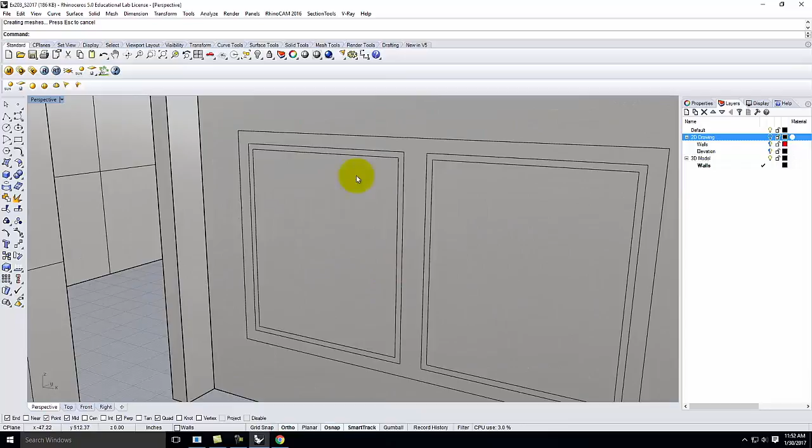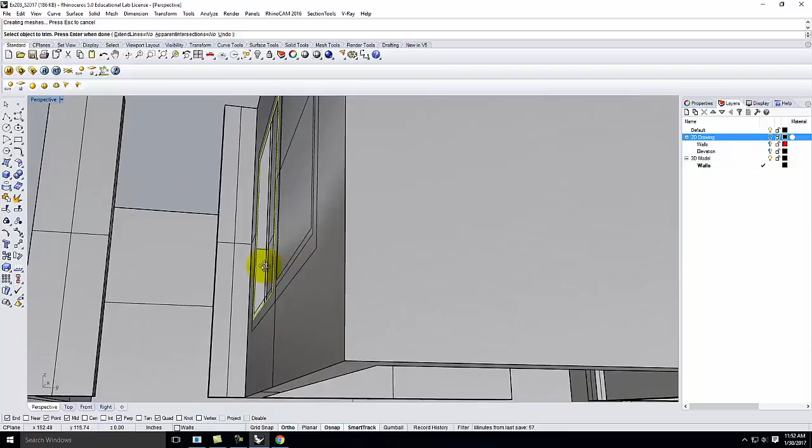Okay, over here, I'm going to do the same thing, but this time I'll use trim. We've already used trim before. We're going to use it again. I'll go to edit and then trim. I'll select that as my curve. I'll hit enter. Select object to trim. I'll select the surface. Okay, so I was able to create a hole in the surface. There, we can kind of see it. Now I need to go to the inside of the wall.

And once again, I'll select this curve, trim, right there. And now I have a hole all the way through that represents that window. Unfortunately, it's still hollow. I don't have any jambs for the window. Right? So I need to put that together. And I'll do that by selecting enter to finish. I'll do that by selecting both curves that I did the trim from. Come on.

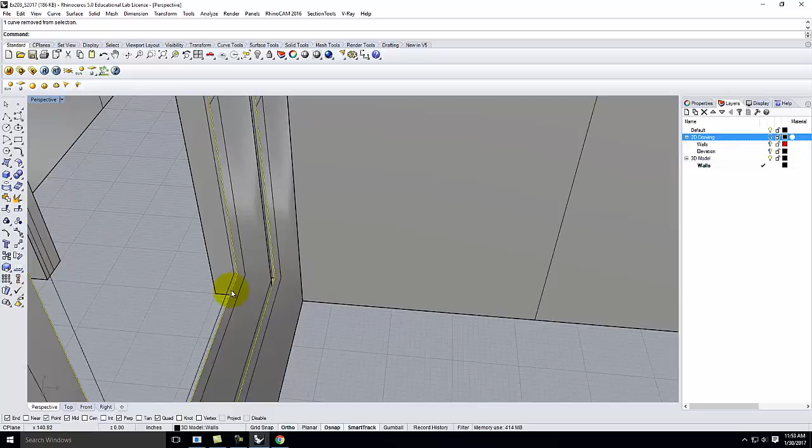Not this. By the way, if you accidentally select something that you didn't intend to, if you switch from shift to control, you can deselect anything out of order. Okay? So I have those two selected, and I'll then go up to surface, loft. I don't need to worry about the seam. It's going to be fine. I'll hit enter, and I'll hit OK. And now I have essentially the same thing that the make hole did. I just had to do it manually.

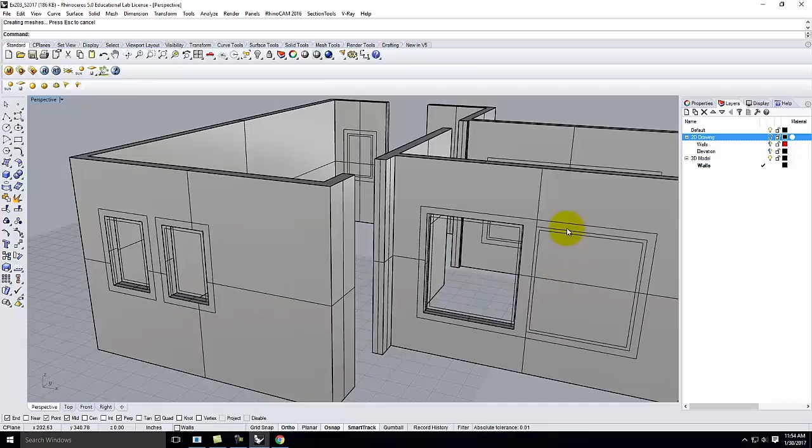Obviously, way more steps involved in doing that, but at the same time, you can do it a little bit easier if for some reason the make hole isn't working. So once again, I'll repeat that. This time, I'm going to make my life a little easier and select both the inside and the outside at once. So there and there. I'll go ahead and type trim, and I will click twice this time to get both of those. Okay, there we go. And so I get through. I'll press enter to finish the trim.

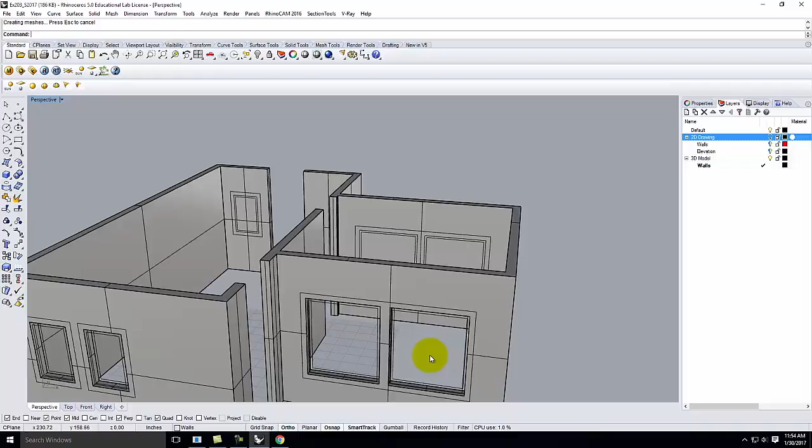Notice that the two objects stay selected, which means I can immediately go into loft and then enter one more time, and I create that inner piece. Okay? So that's one of the things about efficiency that you'll learn: the order in which you do commands and what things are selected can improve your speed as you start to model. Again, not really relevant at this point. So let me practice one more time. I'm going to take this curve right here. This time I'll use the make hole.

Oops. Go to make hole. There we go. Select planar closed curves. There it is. I'll do these together. Why not? Okay. Go ahead and hit enter. Select a polysurface. There it is. My depth point would be right there. And I've now cut through both of those at the same time. Okay. So I have those windows cut.

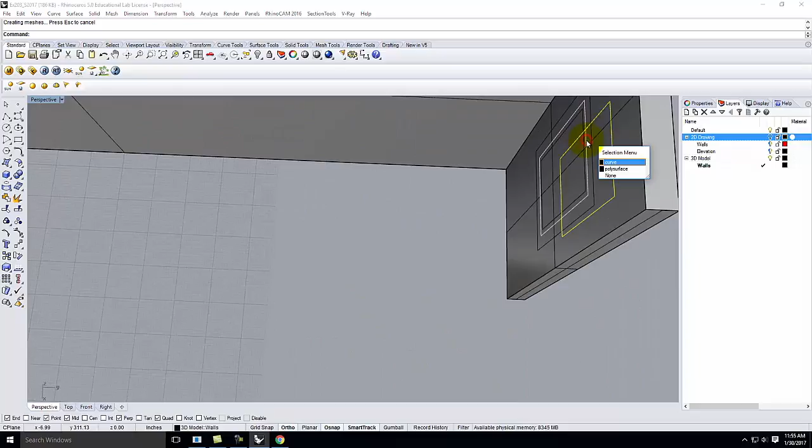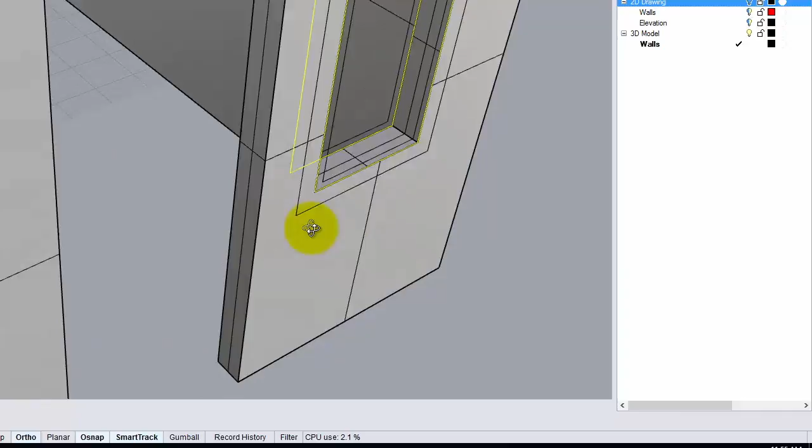Same thing right here. This time I'll do the other method. I'll select both curves. There. Now we'll use trim. I'll just type trim. And then we'll click and click. I've got a hole through. I'll press enter to finish that. And then I can go up to surface, loft. One more enter. And now I have the inner part of the walls. Okay? So there's really two different ways of going about it. Either way is just fine.

Okay? A couple more things that I want to try to do today, and then I'll turn you loose to practice. Remember, today is all about practice. So if you finish this easily, try to make a kitchen counter. Right? Try to do some of the other things that are in there and see how they turn out. The more time you put in practicing now, the better and easier it'll be later on. Okay? So use the time that you have for practice.

I want to show you putting in the tops of the doors really fast. So in this case, the way that we drew the doors left an opening floor to ceiling all the way through for the door. In reality, that wouldn't be the case. There would be a head across the door. And so I want to go ahead and put those in. So I'm going to go back. This time I'll just use the box corner to corner tool, which is right here.

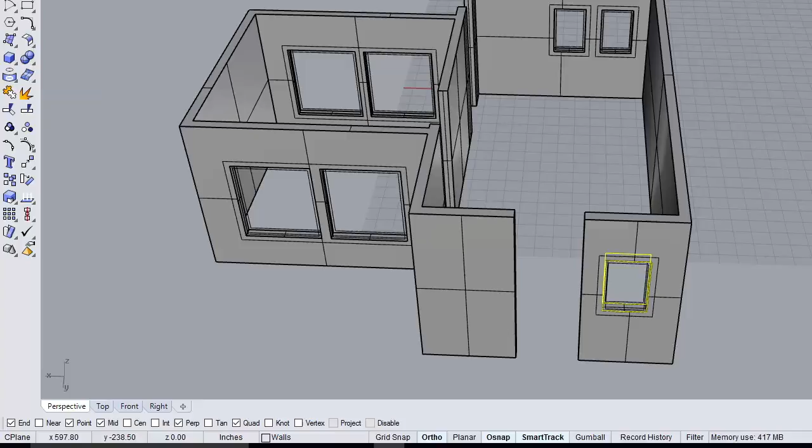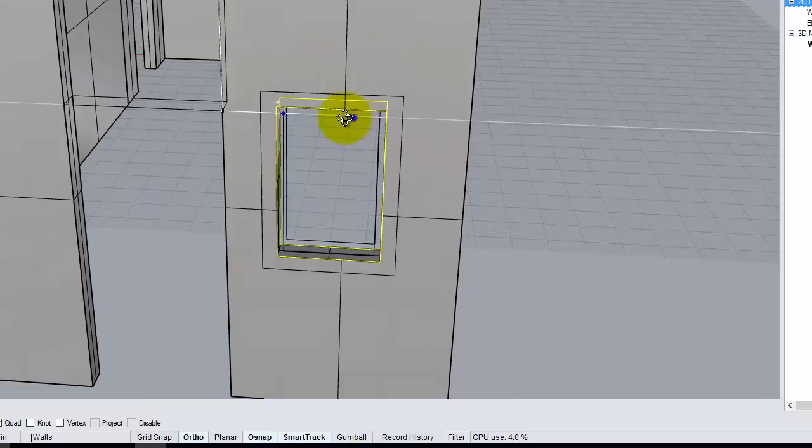It's going to ask me for the first corner of the base. I'll pick that right there as my first corner. My other corner would be right there, if my mouse will click that point for me, thank you. And then I need to go down by a specific amount. Now I know that the height of the door should match up with the height of the window. That's how I designed it. So I'm just going to snap to that height right there. And I end up with a head across the top of the door. Okay? I'll do the same thing in the other places.

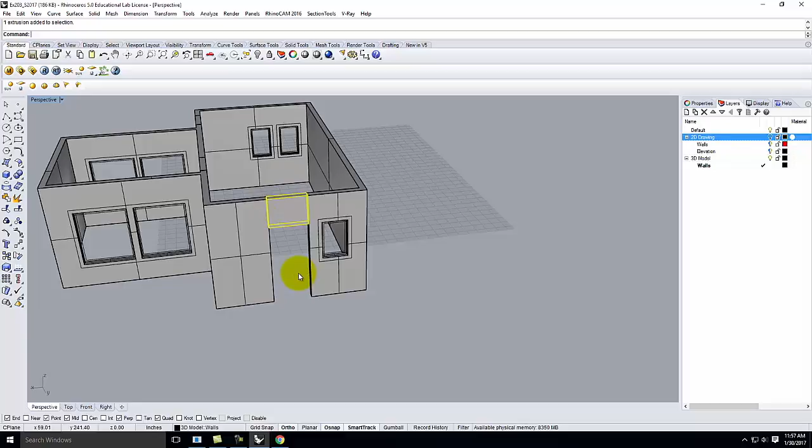So there's a box. We'll go from here to there. And we'll control the height so that it matches up right there. And we'll do it one more time. There, to there, and to right. Oops. There. Okay, so I've filled in those little pieces. Now, these are separate pieces. And at first, you might worry that there's going to be a seam there when we do a rendering. There is a way of making the textures flow across these objects as if the seam wasn't there. So the fact that there's a seam long term isn't going to matter.

Okay? So now that I've finished this, I'm going to create a screen capture of this to prove, obviously, that I worked on it today. So I would go to the little triangle, go to Capture, and then to File. And I would save this, and we'll put it into my folder for today, if I can find it.

And yeah, this mouse is awful. I'm sorry. How many times can I click it?

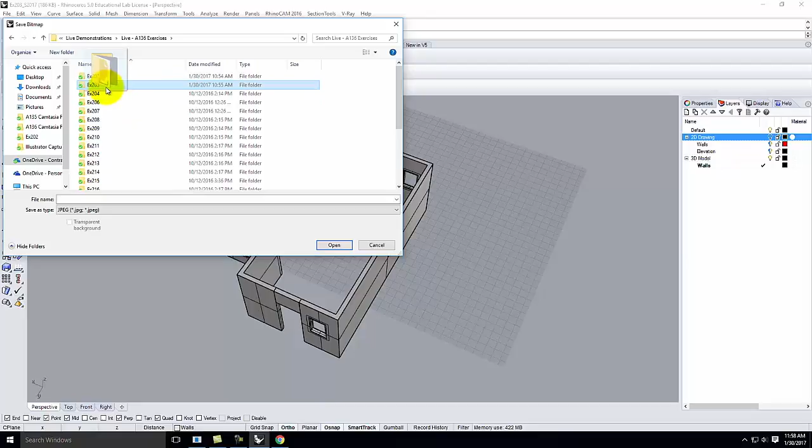Can't win. All right, so then I can call this exercise 203, and we'll say this is spring of 2017. And then I'll go ahead and save it, and then that will be what I post online. Yeah?

Okay? So I know it's a lot to take in. Obviously, I'll float around and I'll help you guys get through these various things. The key part of this for today is to learn Rotate 3D and to be comfortable with Rotate 3D, and then to be comfortable with the project command. Those are the two things that I really want you to get out of today. All right? Okay, I'll turn you loose.